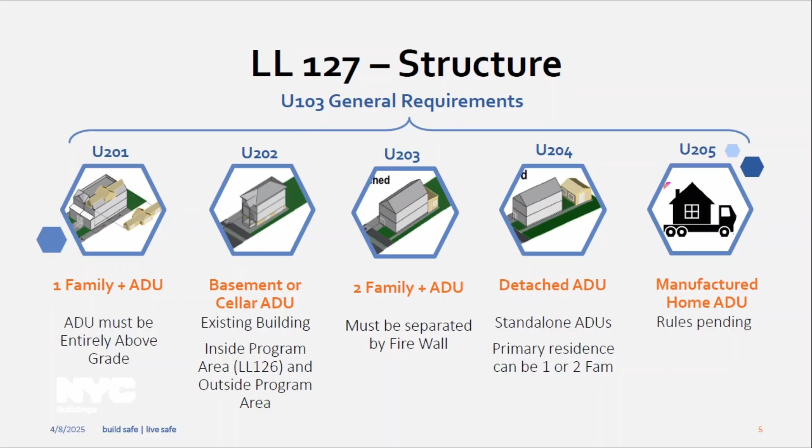U203 is 2 family plus ADU, and it specifically talks about it being required to be separate by a firewall. And U204 is detached ADUs. These are standalones. The primary residence could be 1 or 2 family. And then 205, you have the manufactured home ADU.

So next, please, Mark.

So just some highlights. Again, this is an overview. It's not really a Local Law 127 training. So just some highlights. Just remember, ADUs, you're limited to adding 1. So there's never any scenario where you're adding 2 ADUs. Only 1 ADU is permitted on the same tax lot as a 1 or 2 family dwelling. Appendix U tells you that at the get-go. The primary dwelling must be an R3 occupancy.

And then the next biggest question everyone wants to know is the MDL trigger. So a 2-family adding an adjoining ADU using firewall per BC U203, MDL is not triggered. And so this is actually an interpretation we got from the law department. So it's supported by the law department, and that's how we were able to draft this way: you build a firewall plus an adjoining ADU. These are separate buildings, and the section itself actually tells you that they have to operate as separate buildings, so you're not passing through this firewall in any sort of way.

And so MDL is not triggered, but you see that I have a little asterisk, and it tells you that in Local Law 126, you have to be an eligible program area legalization participant. Now, that is a whole other thing that you have to read 126 to figure out. You have to already have a legal residence, you have to be inside certain program areas, it's all spelled out. But that actually says you can have a 2-family dwelling plus a basement or cellar ADU. So there's an MDL carve out there. So again, unless you're in Local Law 126 legalization.

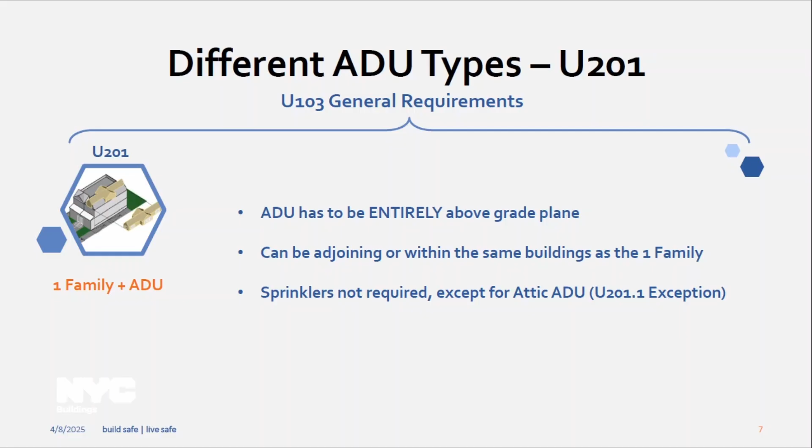So the second type, U202, that's the basement or cellar ADU. These are for existing one or two family dwellings only, so you cannot construct a new building with this ADU in mind. Existing one family can add one basement or cellar ADU. Existing two families adding a basement or cellar ADU triggers MDL and becomes R2 occupancies.

Because again, this is internal, right? So there's no firewall trick you can do in order to get away from MDL. So you flip to R2 in this regard, you trigger MDL. And the asterisk there is that for legalization folks, MDL was actually amended to allow the 2 plus this legalization because of lack of housing policy reasons. But again, you have to be in the legalization to do that.

And then 202.3 also talks about the prohibited locations for basement or cellar ADUs. So the Appendix G special flood hazard areas, you cannot have a basement or cellar ADU. The 10-year rainfall flood risk, these are maps that DEP is currently drafting. These are the inland flood maps. And then there's the coastal flood risk areas.

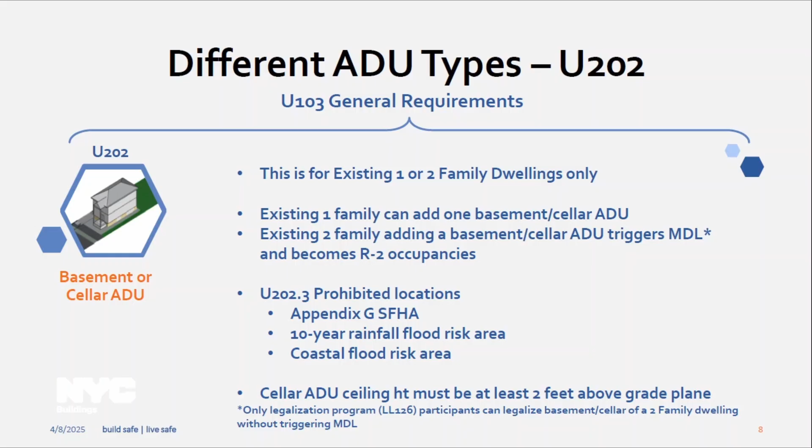Thanks, Mark. Okay. So now we're at the U203 type, and this is the neat trick I told you about, the 2 family plus ADU, but you have to have this firewall. And the Appendix U itself, 203.1, specifically adds on to the firewall definition, which I clipped below, but the law itself actually says it has to be masonry or concrete. And in this instance, when you create this configuration, the ADU is considered a separate building, so it takes you out of the MDL.

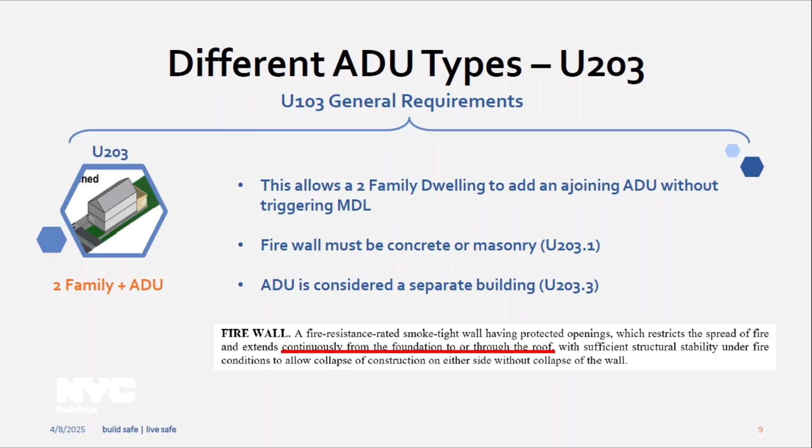Next, please. And then you have 204. This is kind of the granny flat scenario. These are standalone ADUs in the back. The primary dwelling can be 1 or 2 family, and this section covers the garage conversions.

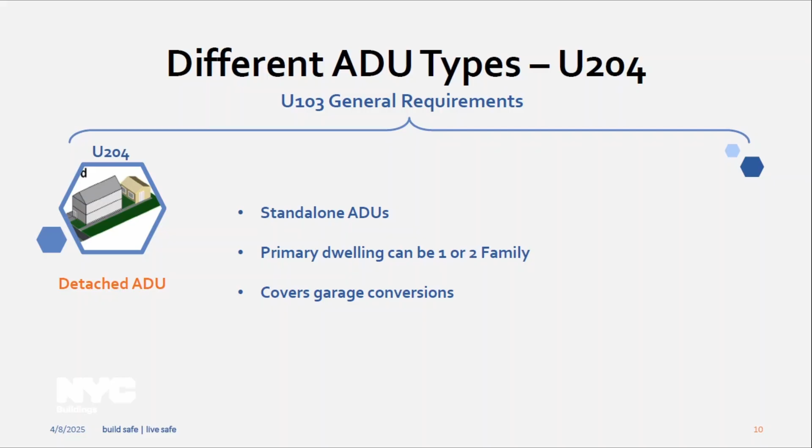And then 205 is the manufactured home ADU. So there is some rulemaking that needs to happen in order to facilitate this. I think we're concentrating all our efforts on the other rule right now for the basement legalization and also the 127 rule, but there's going to be a rule for manufactured home ADUs as well.

If you want to understand the scope of using manufactured homes, there's actually an existing TPPN 6 of 88, which says that the department still has the authority to review for site and zoning connections, but then everything inside is per state regulations. So if you're interested, you can take a look, but there's going to be a rule to follow up on this. And the manufactured home can be attached or detached, similar to the other configurations that were described.

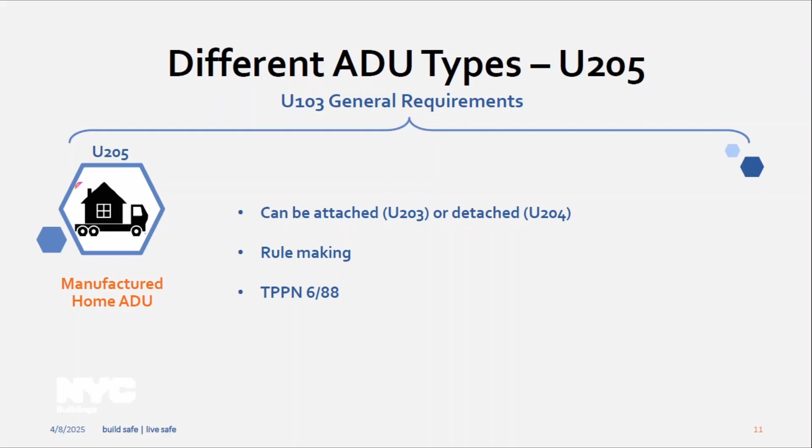And so that's the quick overview before we get into the case studies, and I think Joe would like to make an announcement.

I would just like to take a minute to acknowledge the ACNY committee that prepared the case studies we're about to review. The committee consists of Ida Galea from AIA Brooklyn, Harriet Nikakis from AIA Queens, Michael Sana, Giuseppe Bonomo, James Oliva, and myself from AIA Staten Island. I'd like to thank them for volunteering their time, their effort, and their hard work. Initially, the goal was to create some case studies that we'd have out there by the time it went into play in June. But when the opportunity for today's seminar came about, everybody kicked it into high gear and we got it done. So I'd like to thank them for their hard work.

What we're about to review are a couple of case studies that we prepared. When we were reviewing the local law, there was a half dozen of us on the committee, and I would say every issue we looked at, 3 of us thought it was black and white, and the other 3 thought it was gray. So we felt the need to prepare these case studies. On them, we have some questions that are specific to that particular building type, some of which were already addressed by Mercy, and then we had some general questions as well. So I just wanted to thank them for their effort and turn it back over to you.

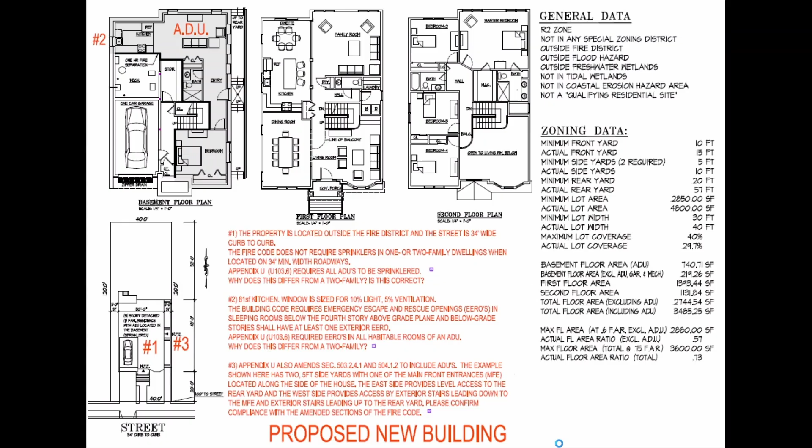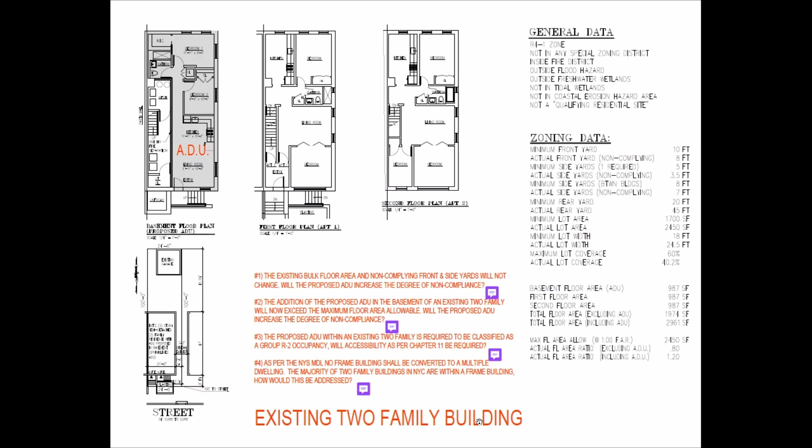So Appendix U, Section 203.6 allows framed buildings to build an attached ADU separated by a firewall. So I guess our answer here is that you would have to look into the different configurations to see what might work for you. But if you want to do an internal one, yeah, you will trigger. But I think with Appendix U, there's different flavors of ADU that one might consider to achieve the addition of an ADU. But if you're in an internal volume, then you're kind of triggering that.

So this is the existing garage in the back, and I believe the site drawing is showing it coincide with the lot lines, right? Yeah, okay. Where it is rear and side, right? Exactly, it's in the corner there. So in number 1, it's basically pointing out that

23-341(b)(4) part something, the size is limited to an area not exceeding 1/3 of the rear yard, and the required rear yard is a certain size, so it's trying to demonstrate that this will be over that coverage. So will the proposed ADU conversion from the existing garage be an increase in the degree of noncompliance? So we think that with ZR 54-53 Part A, which is the specific allowable increase in noncompliance in floor area ratio, we believe that this is okay. So this is not getting into any danger zone with the sections in question 1.

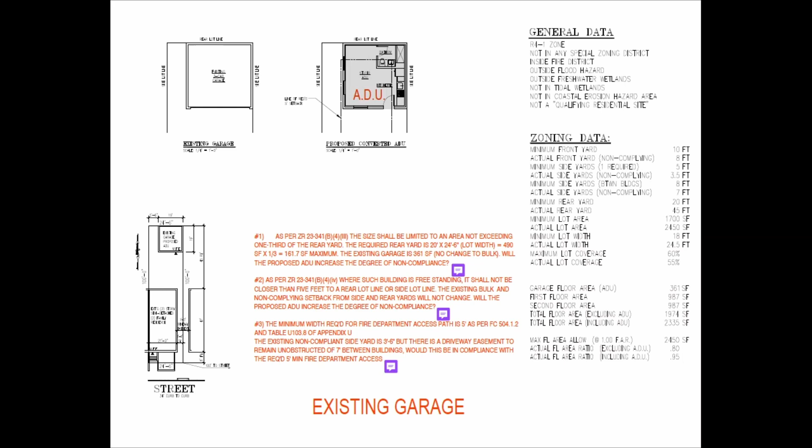Then Part 3, minimum width required for fire department access paths. So FC 504.1.2 and Table U 103.8 of Appendix U talk about the 5 feet fire department access, right? So the specific site condition right now is actually pretty narrow. I think it was a 3.5. Right, so right now the driveway is 7 feet, but it's chopped in half. One belongs to one lot, the other belongs to the other lot. There's a driveway easement. So the question is, is this in compliance with the 5-foot requirement?

So the 5-foot fire department access requirement actually lives in multiple places. It lives in ZR 12-10, and within the definition for ADU, it specifically says backyard ADUs shall be accessible directly from a side yard or open area along a side lot line with a minimum width of 5 feet, which requires the 5 feet to be provided within the zoning lot. Appendix U, the table talks about the 5 feet requirement as well, and then same with the fire code. So while the department generally accepts easement agreements when there are shared driveways with the 5 feet access pursuant to Appendix U, the 5 feet requirement also lives in the ZR, and we can't vary the ZR. So that's the problem we'll run into.

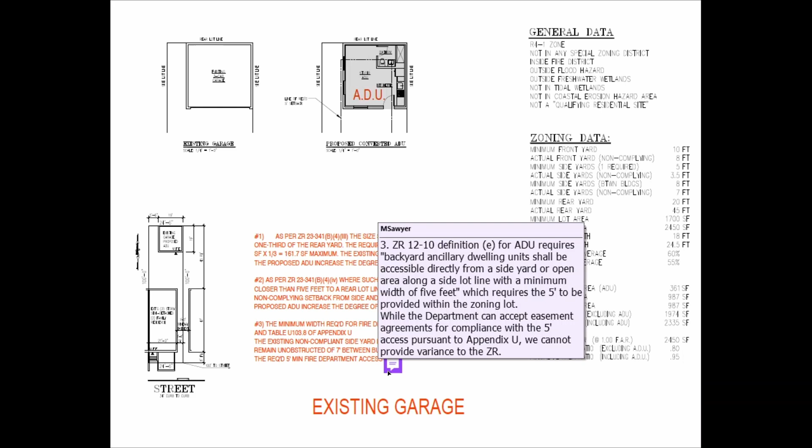I think department practice is that we generally honor these easement agreements, meaning for Appendix U, you're okay, but because the 5 feet also lives in the zoning resolution, the Department of Buildings has no power to vary from the zoning resolution.

Hello? Okay. I just wanted to make a point that the garage scenario, as well as the two-family adding an ADU in the basement scenario, is the same property, and it's an actual real property. That property would not be able to do a basement ADU, nor the garage ADU, because it doesn't have the 5-foot access. So even though zoning allows it, because of the restrictions, it wouldn't be acceptable in this particular property. I just wanted to make that point, that's all.

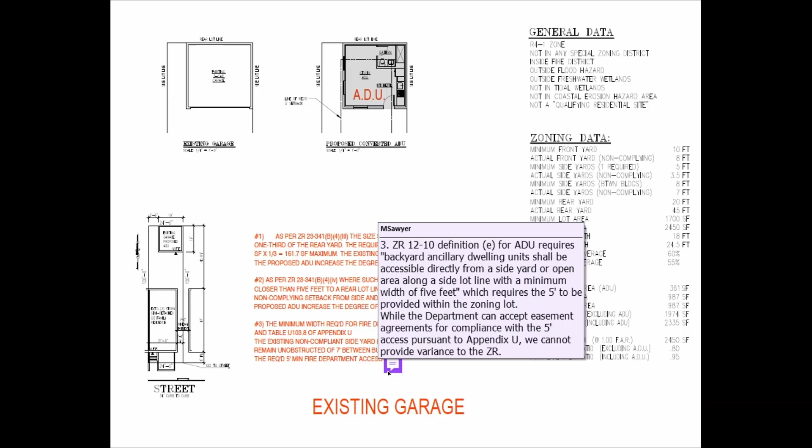Okay, so thanks to ACNY, the committee prepared additional questions that are standalone. So the first one: in Appendix U 101.2.4, ADUs in cellars must have a clear ceiling height that is at least 2 feet above the grade plane. Does this apply to existing structures only? Is it the intent to permit ADUs in cellars of proposed 1- and 2-family dwellings as well?

As I said earlier, Appendix U 202.1 is specifically for existing buildings only. So you cannot create this in a proposed new construction. But note also that if the building is not in the legalization program eligible for Local Law 126, then you're limited to 1 family plus 1 ADU only, either in the basement or cellar.

Appendix U 101.5, Department Rules. Right, so the question was how is this going to happen and how does this affect the current Appendix U document? So as I said earlier, we're actively drafting the rule right now. It will follow the strict rules on how rules are reviewed for public comment, when it is posted, etc. So the rule is meant to complement and supplement Appendix U with clarifications and additional technical details. It's not supposed to be changing the law in any way.

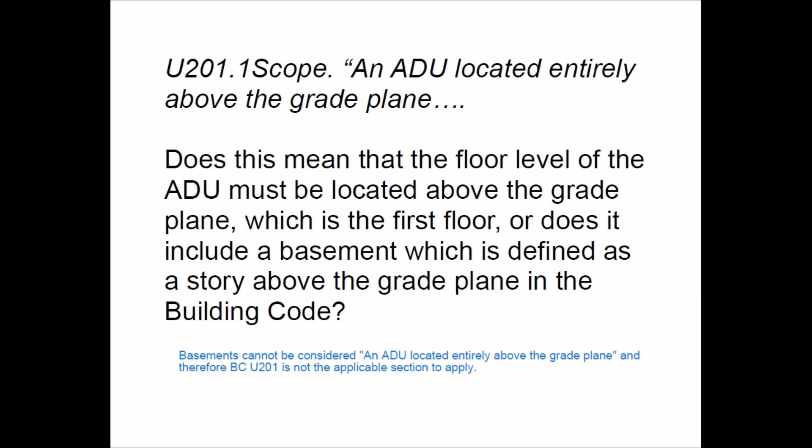So, scope, ADU located entirely above grade, right. So does this mean that the floor level of the ADU must be located above the grade plane, which is the first floor, or does it include a basement, which is defined as a story above the grade plane in the building code? So the language in U201, that particular line actually says an ADU located entirely above the grade plane. So basements, the entire volume of it, cannot be considered an ADU located entirely above the grade plane. So BC U201 is not the applicable section to apply.

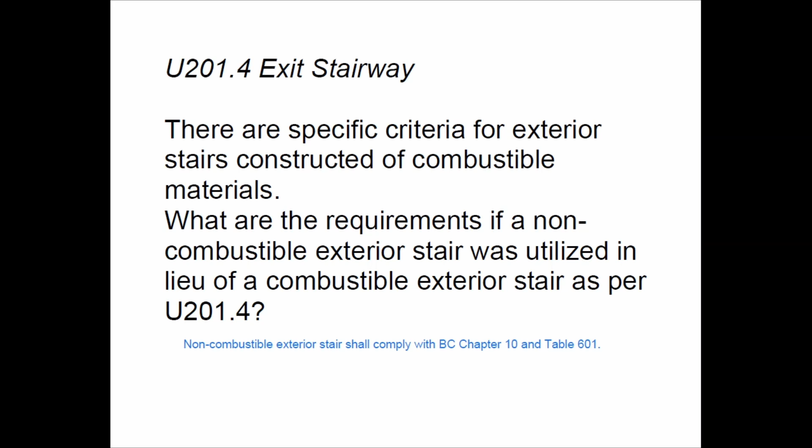This question was about, because in U201.4, we kind of went to the trouble of telling you what to do if you want to do a combustible exterior stair. So the question was, what about a non-combustible exterior stair? What should you do? For a non-combustible exterior stair, you should follow BC Chapter 10 and Table 601, and that should be the correct way to go.

ADU located in the basement or cellar of an existing 1 or 2 family dwelling. The above section indicates a basement or cellar within an existing building. Does section U202 only apply to existing 1 or 2 family residences or to new buildings? It only applies to existing 1 or 2 family dwellings. Section 202.5 spells that out clearly.

So U202, ADU in a basement or cellar: the multiple dwelling law does not allow the conversion of a 1 or 2 family to a multiple dwelling, occupancy R2, in a frame building. The majority of existing 1 and 2 family dwellings are built of frame construction, and this regulation would decrease the ability for a large amount of existing housing stock to convert from a 2 to a multiple dwelling.

So if you are outside of the program area in a frame building, 1 family plus ADU is permitted per BC U202.4. You're really stuck. You cannot really go from 2 to more. But if you are inside the program area, U101.1.1 allows 2 family plus ADUs in a frame building. But again, that's Local Law 126.

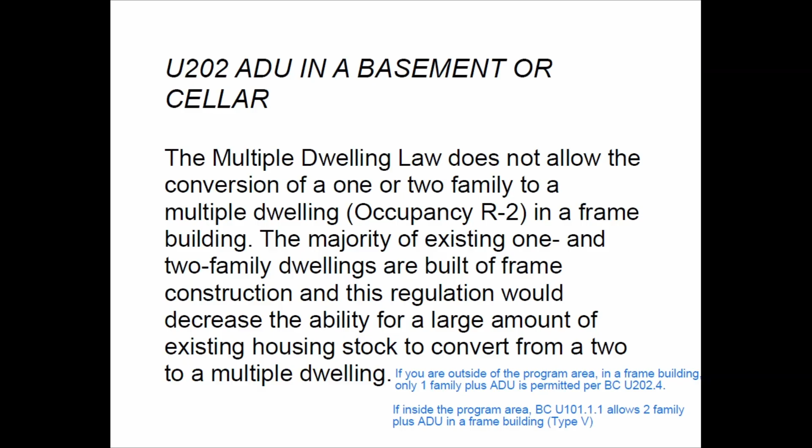Emergency escape and rescue openings. This is saying BC 1030 says only sleeping rooms are required to have this, but Appendix U says you have to have it in every habitable room, so how should this be applied? Per BC U101.1, ADUs shall comply with the entirety of the New York City construction codes if Appendix U does not specifically address it. But if Appendix U specifically addresses it, then Appendix U governs. So the more specific applies. Clearly if you're doing an ADU, you should be following Appendix U.

This is 203, ADU separated by a firewall from a 2-family primary dwelling. The question is, the firewall is a rated wall that must extend continuously from the foundation to or through the roof. Does this section apply specifically to ADUs attached to 2-family dwellings? Is this the intent? Can ADUs in the basement of a Type 5B be separated from a 2-family residence by a fire division?

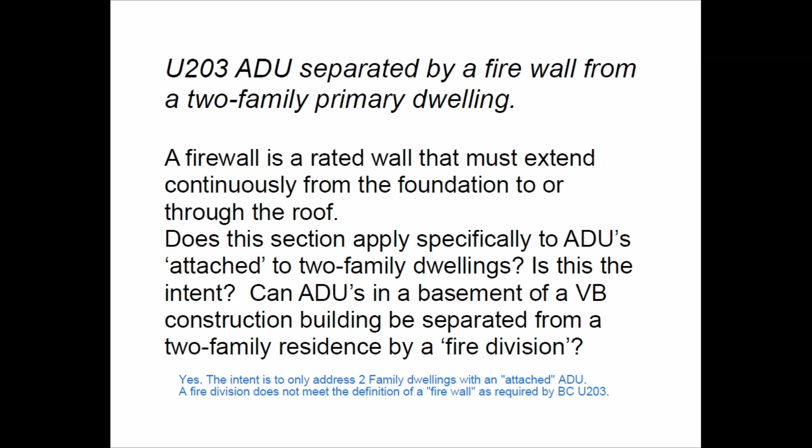The intent for 203, where the title is ADU separated by firewall from a 2-family primary dwelling, is really to only address 2-family dwellings with an attached ADU. A fire division would not meet the definition of firewall as required by BC U203. So the scenario described at the end of the question is not really possible.

This is the Fire Code 504.1.2. It was amended by Local Law 127. It asks what is meant by an open accessory parking area not less than 5 feet in width shall be sufficient to constitute unobstructed access to a rear yard, regardless of parked vehicles in such parking area. Then it posits that the minimum parking area width needs to be at least 8, so does that mean you need to do 8 plus 5 for unobstructed access? If so, that would mean the driveway has to be not less than 13 in order to meet this access to the ADU.

So per Appendix U and also the Fire Code amendment, as long as you have 5 feet provided for FD access, it is considered compliant. 13 feet is not needed. The language quoted up there is actually just fire code language that's been carried over and hasn't been revised by the local law. The existing language acknowledges that there could be parked vehicles and it doesn't affect compliance.

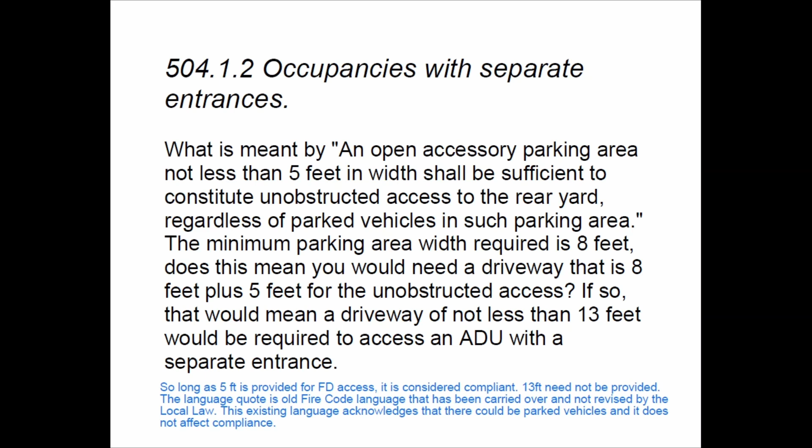Thank you, ACNY, for sending over the DOB NOW questions as well. You've marked up what you think will be necessary in order to file for an ADU in DOB NOW. I don't have answers for what is being done, but I will take your suggestions and concerns back to the IT crew.

Just one question, I think it's more of a comment, but you indicated that Appendix U is for existing buildings, right? The section for basements and cellars is for existing buildings. Yeah. But the zoning resolution allows ADUs in new construction. I can build 100 new row houses with ADUs built into them? Yes. I just want to make sure I understand that.

It's only U203, I think, for basements and cellars. You can comply with the building code and do a basement dwelling anytime, but I don't have to comply with Appendix U if I comply with the building code for a new unit, right? Sure, yeah. Okay, I just want to make sure.

In terms of conversion of a cellar or basement, the requirement was that the ceiling of the cellar has to be 2 feet above grade. How does that work with the required emergency escape requirements? Because you can't get a window in that space. Are you allowed to carve out a portion of the rear yard to create some sort of a well to get out of there?

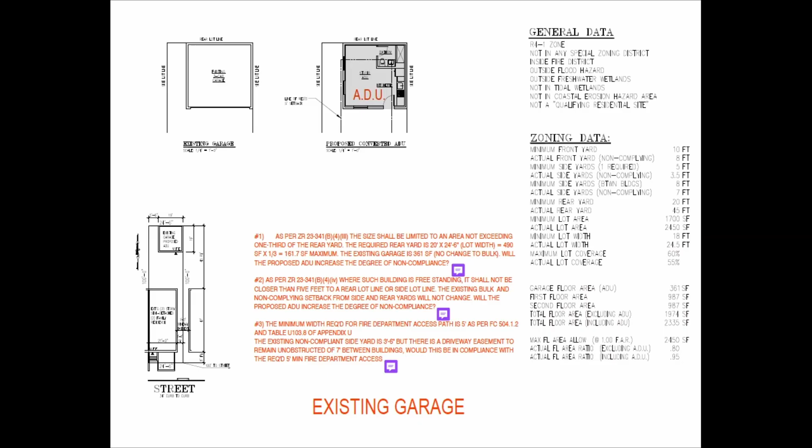Hi, thank you very much for this presentation. We really appreciate it. One of my questions was regarding the site connection, which you said is being discussed. So thank you very much for that. Being that DOB Now Build is getting updated to accept these filings that are coming in after June 16, is there a specific unit that is going to be reviewing these applications, or is it going straight through the normal channels? And is there a possibility of expediting these types of units, not self-certified, but just the review time of it? And the last question, quickly, is will we be able to get these slides somewhere, like download them or something?

Beautiful, beautiful. So there have been, I thought I knew the answer, but then a couple days ago, it seems like the answer changed. So I think I would need to get back to this gentleman on which unit is reviewing, whether it is in all boroughs or is it central. I don't know. And then the pro-cert question, I will also get back to you. I think it's more prudent that I do that. Great. Thank you so much.

Thank you. Yes, I have another question. Regarding required dimensions for habitable spaces, in the new code, you need to have 8-foot ceiling heights. And this is more for the attic and the cellars. Obviously, existing buildings, for the most part, don't have that ceiling height. I know in the 1968 and prior to 1968 code, they have some provisions for the cellar to be 7 feet. Is that going to affect an ADU? Are there any exceptions for a ceiling height that's less than the required? Did you say 8? It's 8 feet, right? Okay, so I think Appendix U has less than 8. Oh, it does, okay. I believe it's 7.